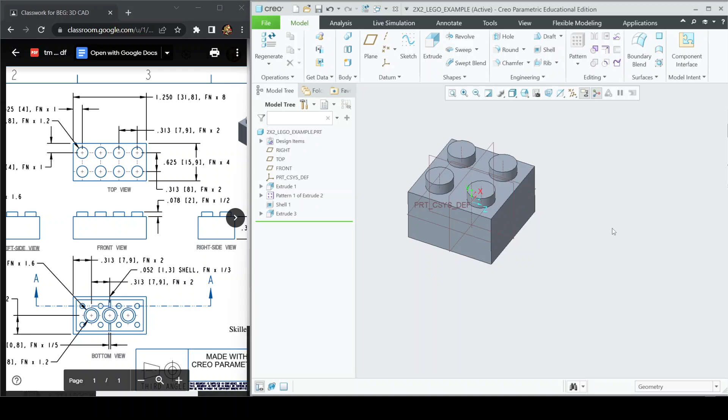Alright, let's go ahead and create a new file. I'll just call it 2x2 Lego brick. And we have our drawing standard right here.

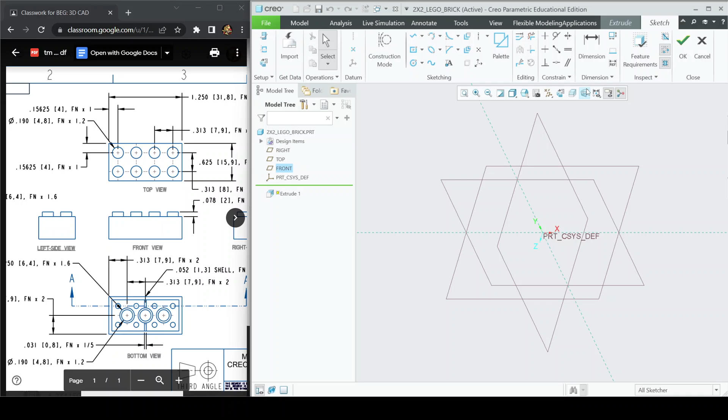So let's start with an extrude on the front plane. Hopefully you've done this a few times by now. And center rectangle.

Okay, let's think about what dimensions we need to create the 2x2. Since we're creating on the front plane, we're looking at this portion right here, this rectangle. We want to get the total width of the 2x4 and divide that by half, and then get the height. That'll give us this rectangle that I'm outlining with my mouse.

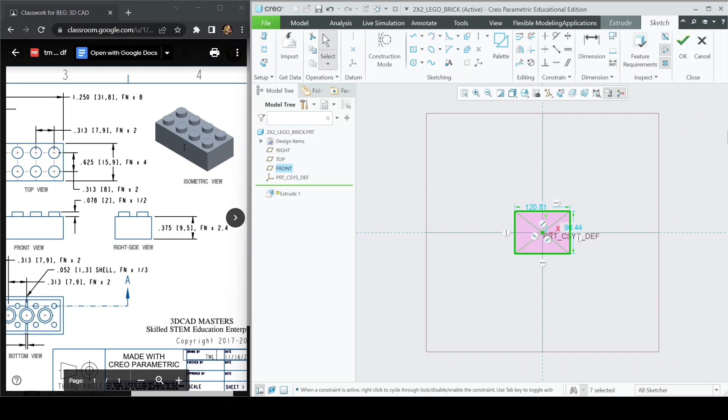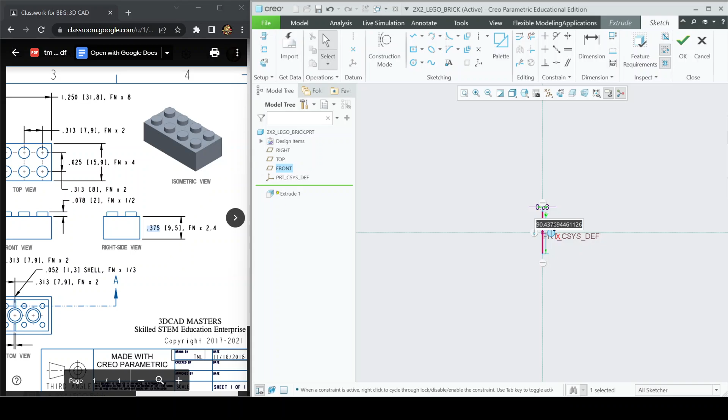On the figure, this is the total width of the figure, which is 1.25. We are going to divide that by 2, and that'll give us the distance from here to here, from the center to here. Then for the height, it remains unchanged, it's just going to be 0.375. So 0.375, go ahead and reshift that.

And we can OK that. It's going to ask us for a depth, and the depth is going to be the same because this piece is square. So we can just use this distance right here, 0.625, which you'll notice is half of 1.25.

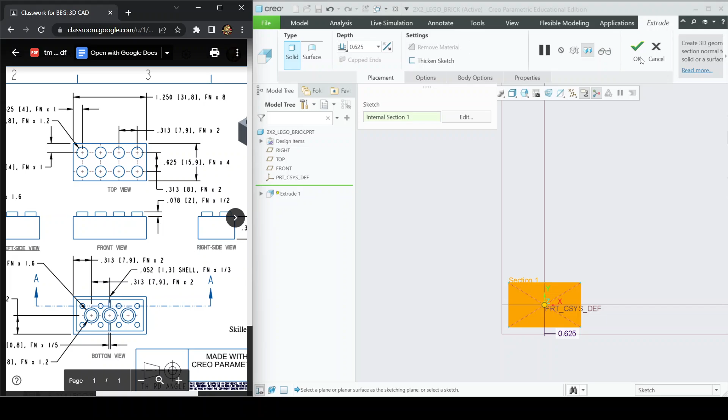Alright, so let's go ahead and OK that. Control D to reorient. Alright, and we have the 2x2 brick. Studs will go here, and we'll put the tube on the bottom right there. So let's extrude one stud, and then we'll just pattern it to the other 3 spots.

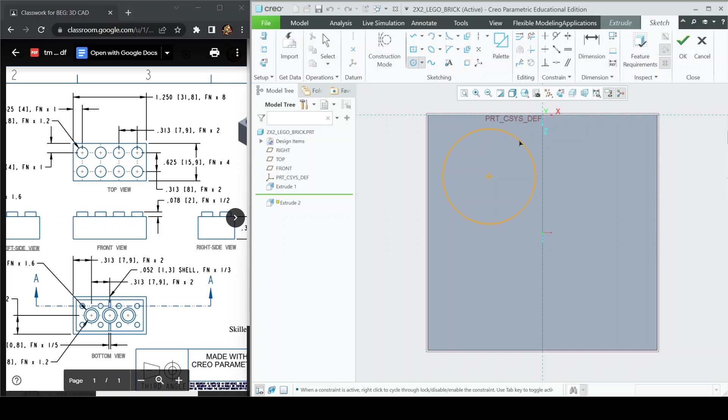Let's go ahead and plop a circle down. Looking at the top view, we can see that we got this arrow right here, which tells us that the diameter is going to be 0.19.

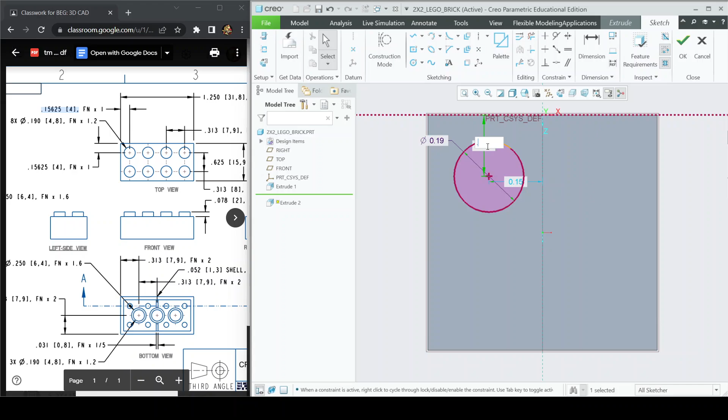And then right here is going to be 0.15625 from both edges. Okay, so let's go ahead and OK that.

And our height we can get from the front view. You can see that the height is 0.078. So that's one stud.

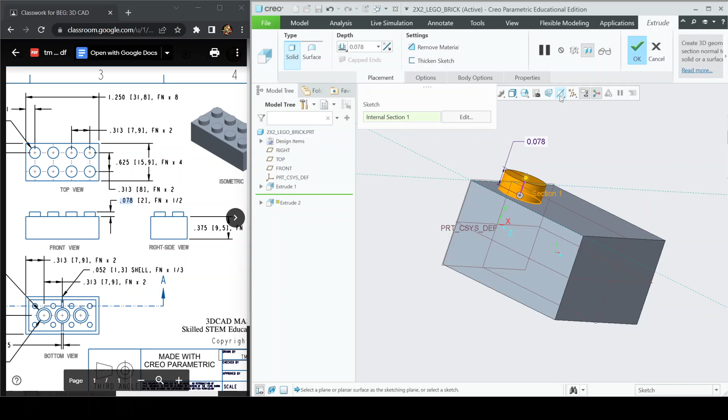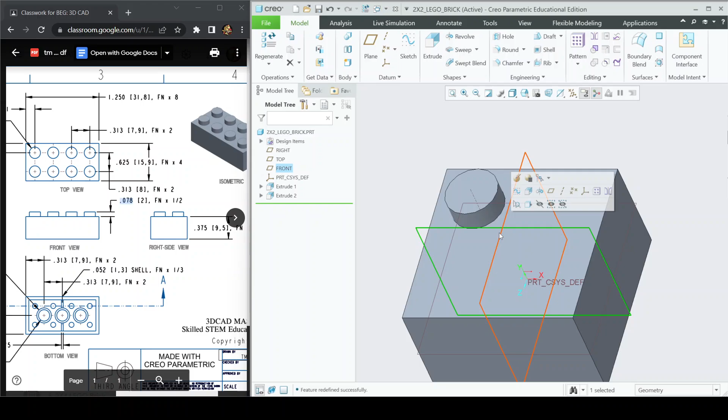And I've just noticed that we did not extrude symmetrically. So it would be a good idea to go back to extrude one. This is very easy to fix, just change that to symmetric. And you'll see now that this plane is in the center, whereas before it was on the outside. So now we have these two planes, and they intersect in the very center of the piece, which is always helpful.

It'd be very useful if we need to say mirror. Okay, so let's go ahead and select our stud, and we'll pattern it by direction. And we're going to define the first direction as going down the piece.

So imagine this as the edge, the pole along which it's traveling. If we click that, you can see it's going to go in the same direction, parallel. So we have 2, which is including the original, so 1 and 2, which is correct.

And then we just need some spacing, and they conveniently put that right here as 0.313. Okay, you see it says click here to add item, so we just click here and it asks us to define the second direction. So select a plane, flat face, linear curve, axis.

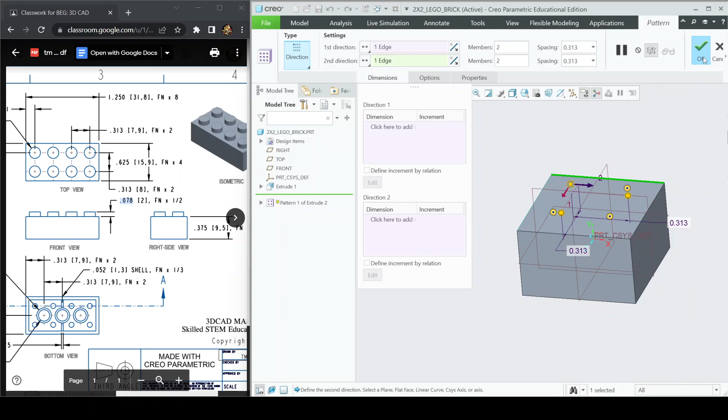So we'll just select this edge right here. And notice it's going in the wrong direction, but we can just flip it around by clicking on the little arrow right there. And the spacing is once again 0.313. Okay, so let's go ahead and OK this. And you can see it inserts 3 more studs, one right here, one right here, and one right here.

Alright, let's shell out the bottom. We'll select shell. And of course, the thickness is given to us right here as 0.052. So we'll just plug that in right there and select anywhere on the bottom. And OK.

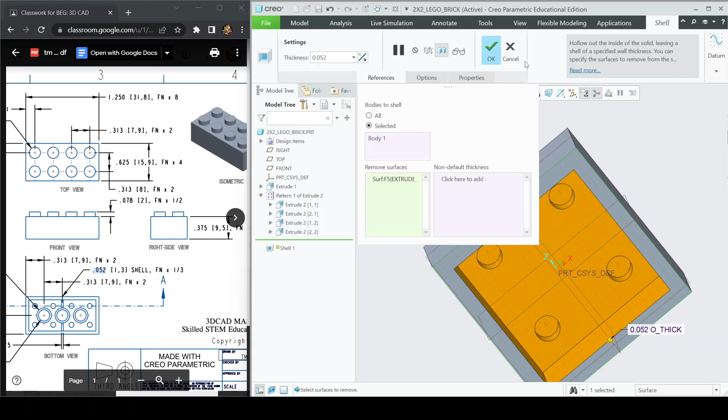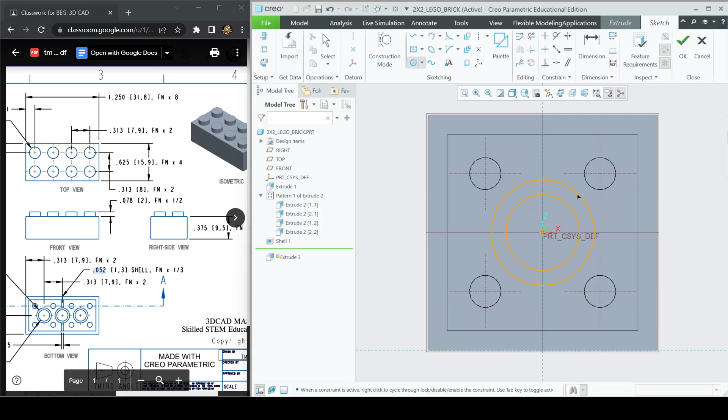Alright, now we need the tube. So you can either extrude from here down to here, or from here back up to here. I prefer to extrude from the bottom. So I will sketch view, and remember that to create the tube, we need 2 circles, because these tubes are hollow on the inside.

And we are given our 2 diameters. One is 0.25, that's the outer, and 0.19, that is the inner.

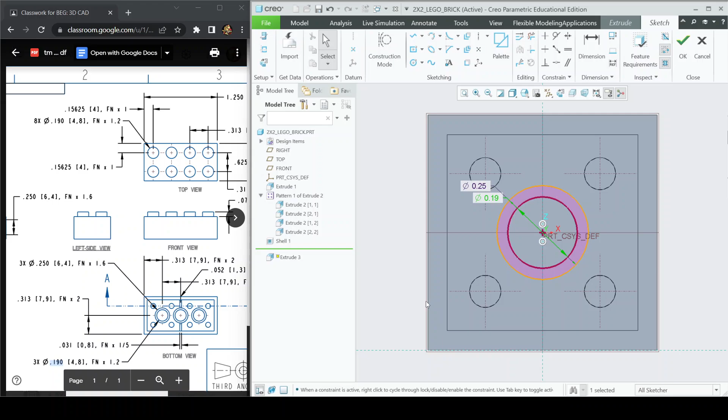You can OK that, and then you can choose the 'to' reference and select the bottom of the piece as a reference, and it will extrude until it is level with that surface. Okay, go ahead and OK that. And that is the 2x2 Lego brick.